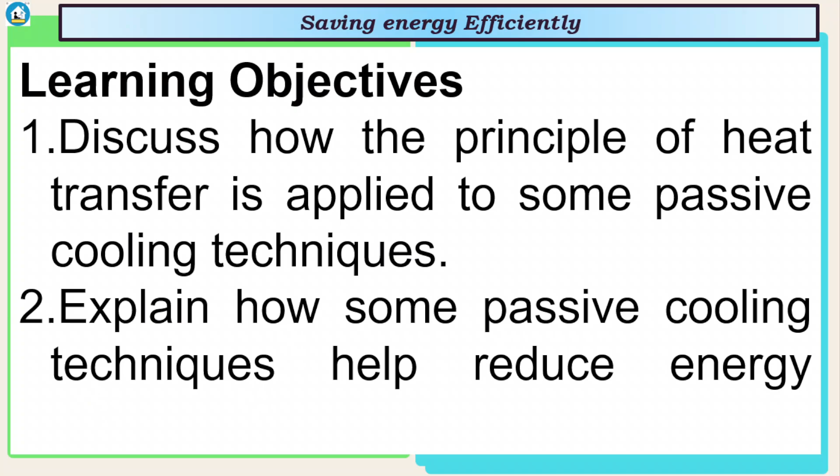An attic is a space located just beneath the roof of a house, often with limited headroom. Is having an attic a good idea in tropical countries? Its primary purpose is to create a buffer zone between the living spaces of the house and the external environment. While an attic can provide additional storage, ventilation, and insulation, it can become excessively hot in some tropical countries, especially without proper insulation, ventilation, and shading.

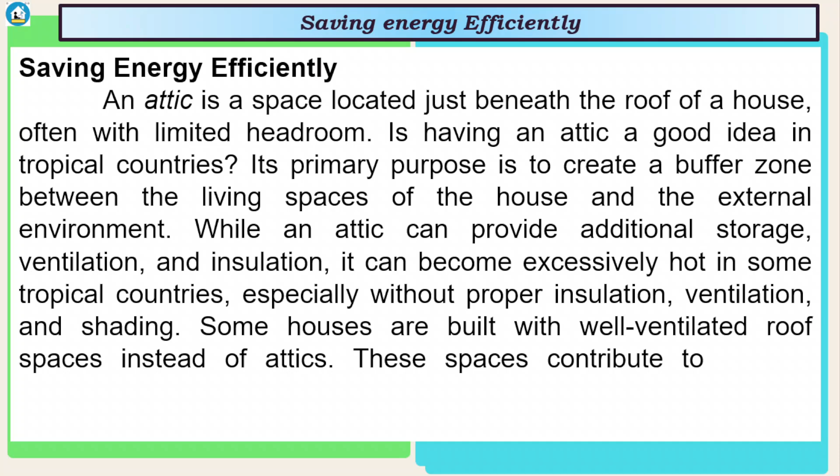Some houses are built with well-ventilated roof spaces instead of attics. These spaces contribute to passive cooling by providing a buffer zone between internal and external spaces, particularly in the most difficult area to shade, the roof.

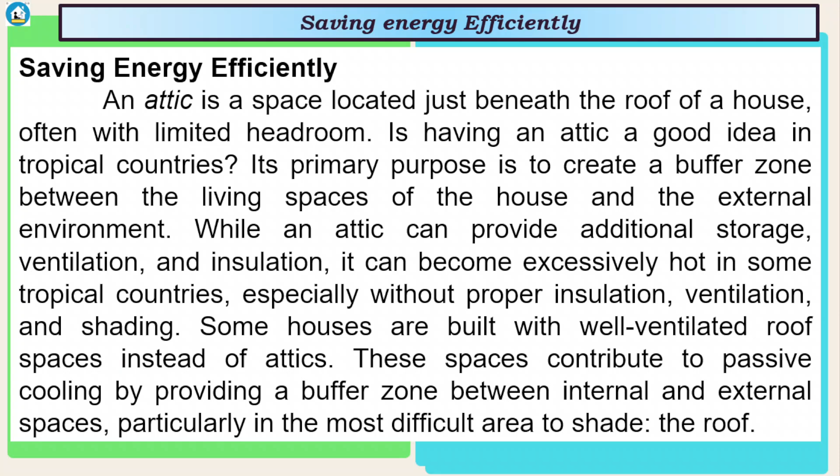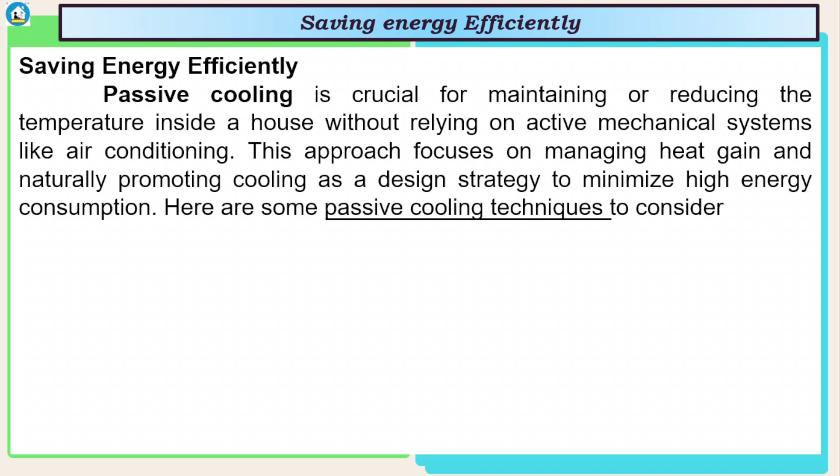Passive cooling is crucial for maintaining or reducing the temperature inside the house without relying on active mechanical systems like air conditioning. This approach focuses on managing heat gain and naturally promoting cooling as a design strategy to minimize high energy consumption. Here are some passive cooling techniques to consider.

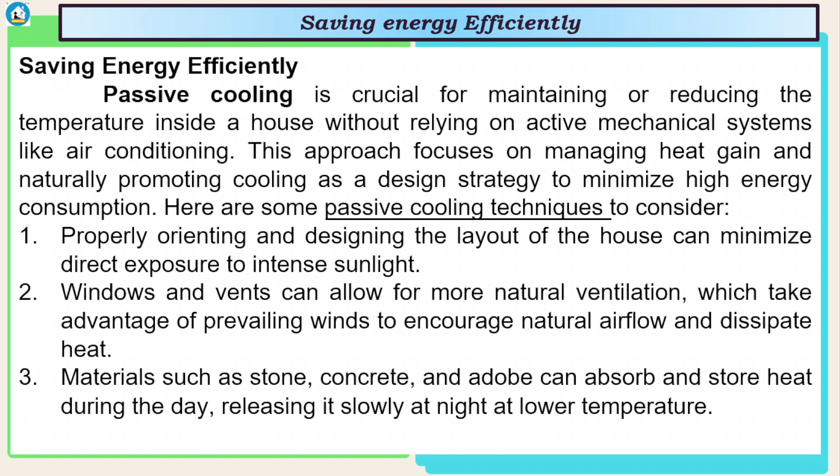Number 1, properly orienting and designing the layout of the house can minimize direct exposure to intense sunlight. Number 2, windows and vents can allow for more natural ventilation, which take advantage of prevailing winds to encourage natural airflow and dissipate heat. Materials such as stone, concrete, and adobe can absorb and store heat during the day, releasing it slowly at night at lower temperature.

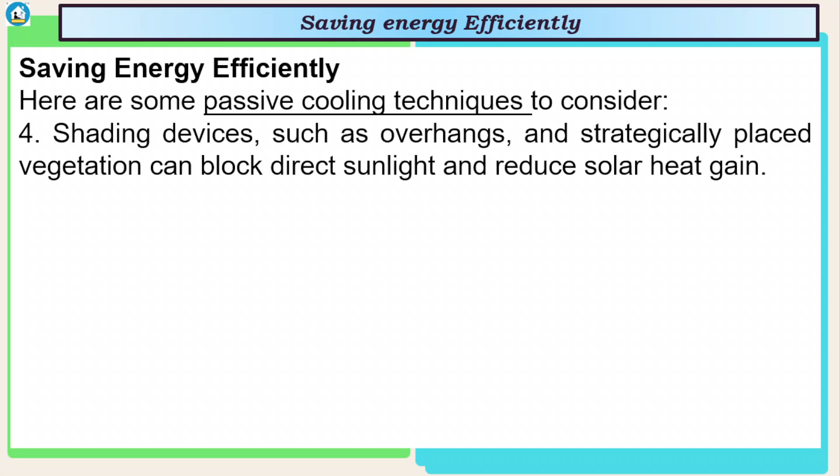Number 4, shading devices such as overhangs and strategically placed vegetation, like trees, can block direct sunlight and reduce solar heat gain. Using insulation and light-colored, highly reflective roofing materials can prevent excess heat from entering the house. High thermal performance windows with low emissivity coatings and multiple panes can reduce the amount of heat that enters the house. Incorporating natural cooling elements like ponds, fountains, and vegetation can create cooler microclimates than the surrounding area.

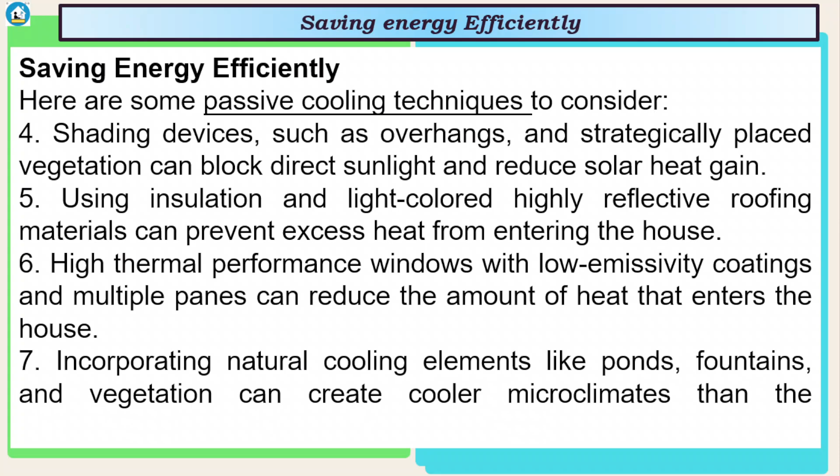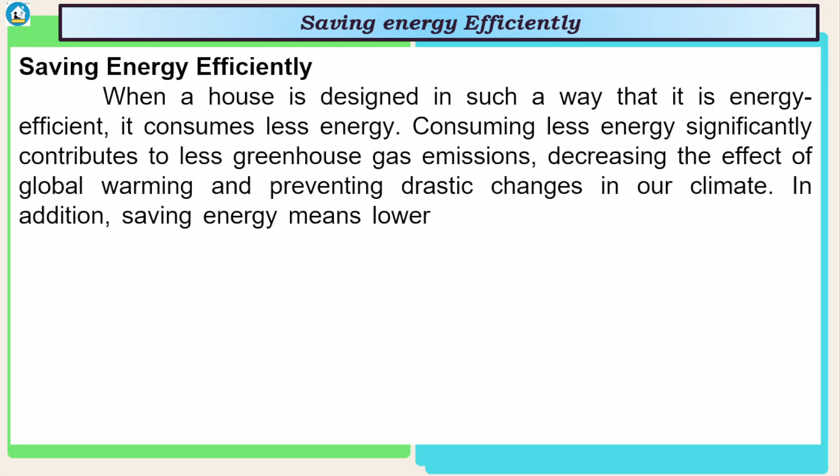When a house is designed in such a way that it is energy efficient, it can consume less energy. Consuming less energy significantly contributes to less greenhouse gas emission, decreasing the effect of global warming and preventing drastic changes in our climate. In addition, saving energy means lower energy bills, improved air quality, conservation of energy resources, and reduced pollution. In other words, saving energy means making an effort to create a better environment, ecosystem, and biodiversity.

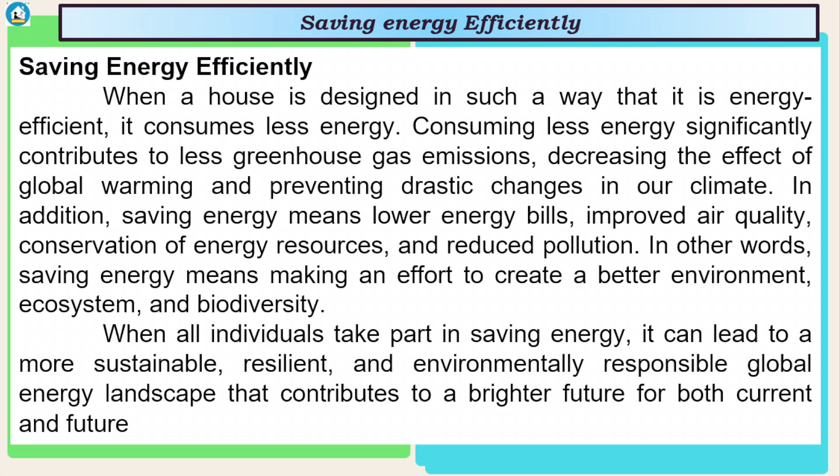When all individuals take part in saving energy, it can lead to a more sustainable, resilient, and environmentally responsible global energy landscape that can contribute to a brighter future for both current and future generations.

An increased emphasis on energy efficiency encourages research and development of new technologies and solutions, driving innovation in the energy sector. The following are some innovative devices that can be used to transform heat into electrical energy.

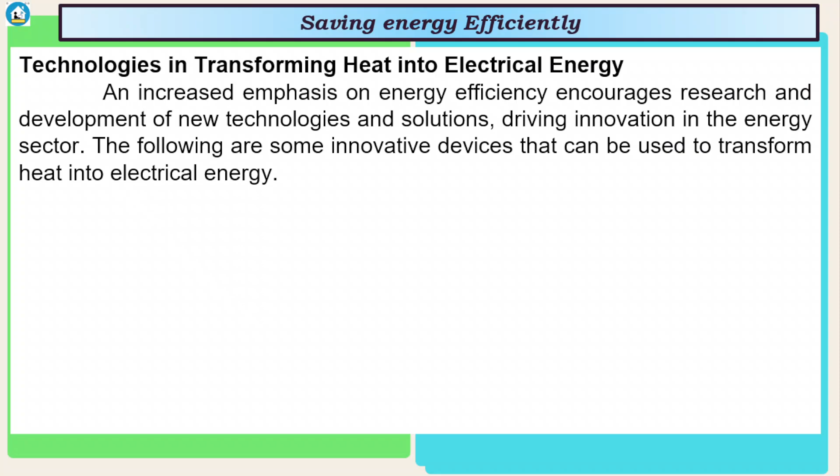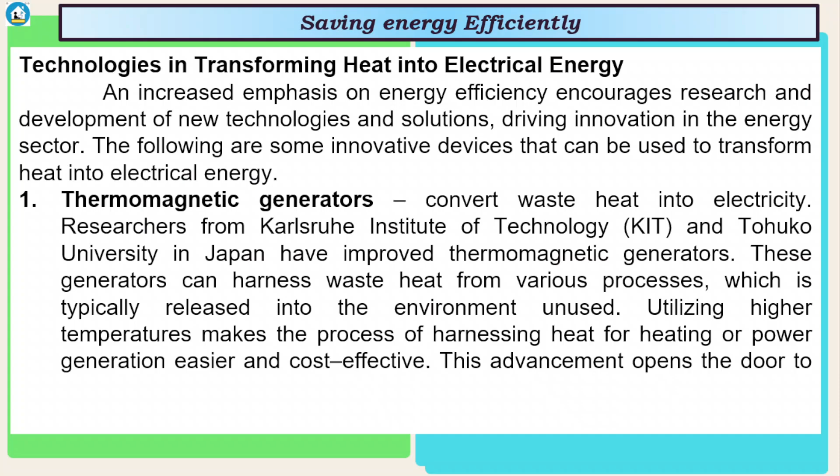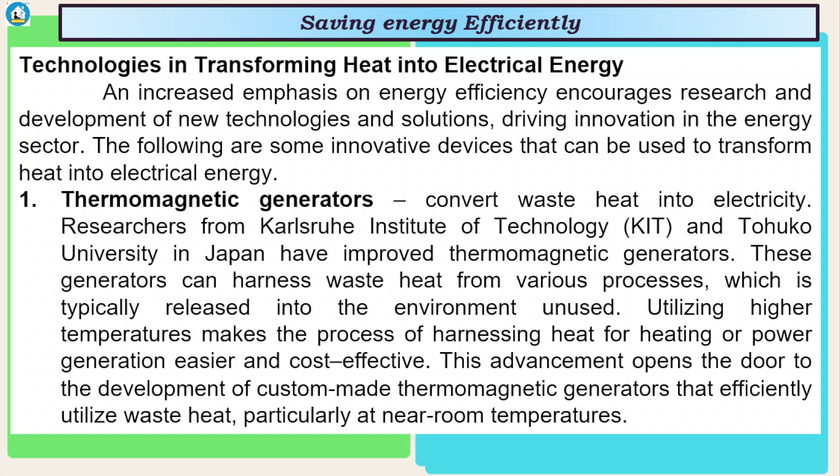Thermomagnetic generators convert waste heat into electricity. Researchers from Karlsruhe Institute of Technology and Tohoku University in Japan have improved thermomagnetic generators. These generators can harness waste heat from various processes, which is typically released into the environment unused. Utilizing higher temperatures makes the process of harnessing heat for heating or power generation easier and cost-effective. This advancement opens the door to the development of custom-made thermomagnetic generators that efficiently utilize waste heat, particularly at near-room temperatures.

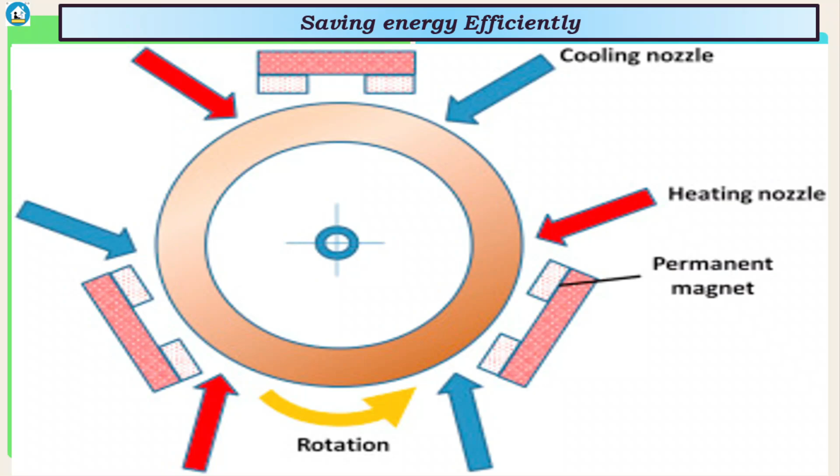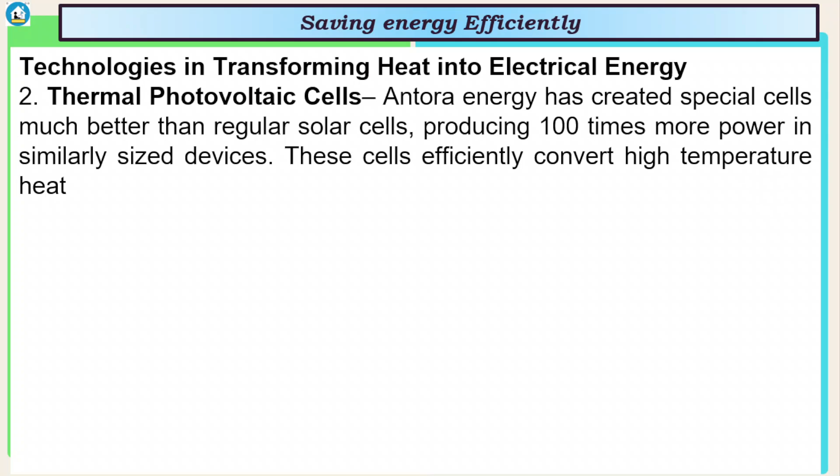For number 2, thermal photovoltaic cells. Antora Energy, the company, has created special cells much better than regular solar cells, producing 100 times more power in similarly sized devices. These cells efficiently convert high-temperature heat into electricity, primarily for thermal energy grid storage applications.

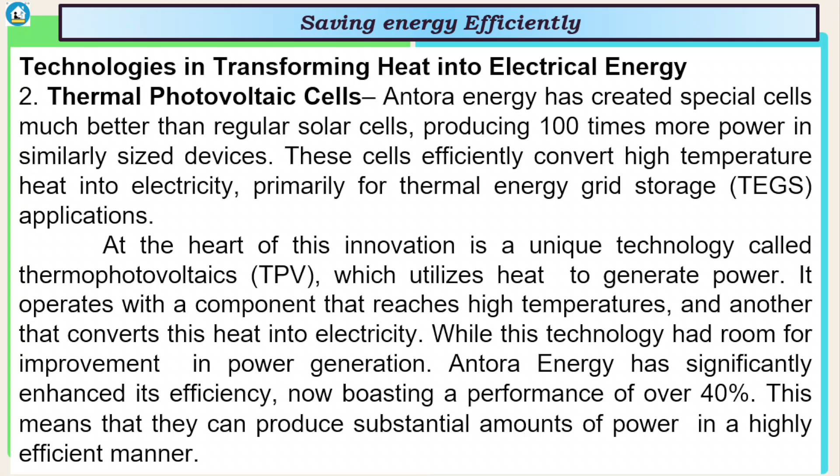At the heart of this innovation is a unique technology called thermophotovoltaics, which utilizes heat to generate power. It operates with a component that reaches high temperatures and another that converts this heat into electricity. While this technology had room for improvement in power generation, Antora Energy has significantly enhanced its efficiency, now boasting a performance of over 40%. This means that they can produce substantial amounts of power in a highly efficient manner.

So here are some gadgets for reducing global warming. Around the globe, the sector that consumes the most electricity are households. Thus, it is important that energy-saving steps begin at home. Energy-saving smart gadgets intended for home use are now available in the market. These include kitchen appliances that offer convenience, safety, and energy efficiency.

Here are some examples. Number 1, infrared speed oven is a type of oven that uses infrared radiation to rapidly generate heat, allowing faster cooking. It also enables thorough and even cooking for food.

Number 2, smart oven. It is an oven that can be used for convection baking or cooking, food warming, and air frying. Even if you are not in the kitchen, it can be controlled via Wi-Fi connection. And number 3, smart air fryer is like a conventional air fryer that is essentially a countertop convection oven. It can generate and circulate hot air around the food.